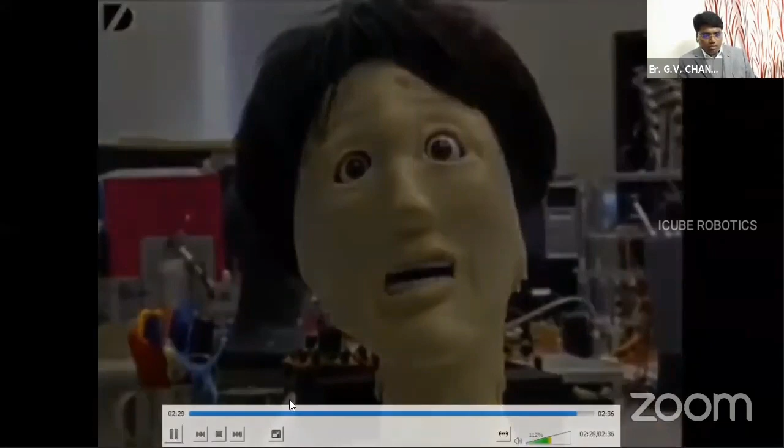So here we saw, now you would have understood the basic understanding of how robots have evolved. There are a lot of videos actually available to understand how, from the 15th century to our current century, robots have evolved. But at a given time, this small glimpse of a video made you understand that initially the robot doesn't have a proper structure, in terms of movement and stuff like that. And probably in later days, as you saw in the last video, even emotions can be programmed. So that's how robot evolution came into existence.

So nowadays, even the humanoid robots have evolved into an extreme called andro-humanoid robot, which exactly resembles a human being. So in that video you would have seen, initially Sony brought in the Aibo robot dog, and then different generations of robots, bio-inspired robots, and then they started introducing into the market the first humanoid robot, Asimo. Just remember this, Isaac Asimov, who coined the word robotics.

So next, getting into the other stream. Yes, we have more participants who join now. Just to brief you, we explained about what a robot is, the difference between a robot and a machine, then we discussed about the laws of robotics.

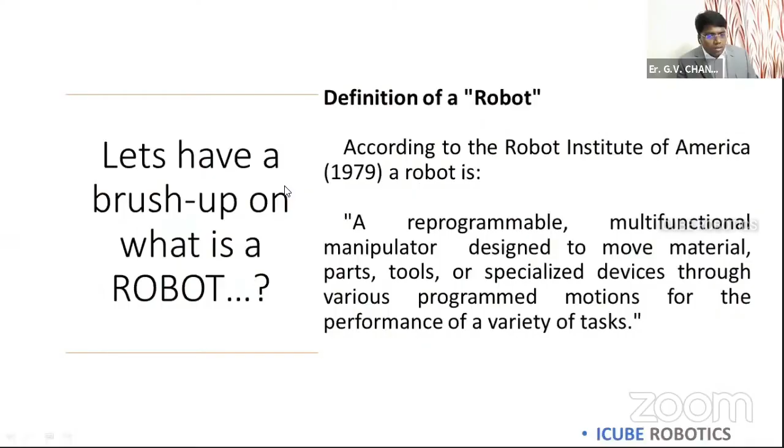Basically, robotics is a multidisciplinary engineering subject, and I am very glad that this presentation is given for 12th standard students. This 12th standard is a very important stage where you choose what kind of engineering, and this choice of your career in engineering, as well as the college, will actually make you what you are in the future. So that's the basic foundation required right now.

During this 12th grade, I am happy this institution has arranged this for you, so we're getting into understanding the different streams of engineering required to get into a robotics-based company. Starting with robotics, you cannot constrain a robot into just one subject or box. Robotics is a multidisciplinary engineering field, so whatever engineering stream you're in, you have an opportunity in robotics. That's good news for you today.

All the designing and external work in terms of getting into the real design of the robot, the mechanical engineer takes place. Next, we have the electrical engineer. You might be wondering why electrical engineers also have a very major role in robotics.

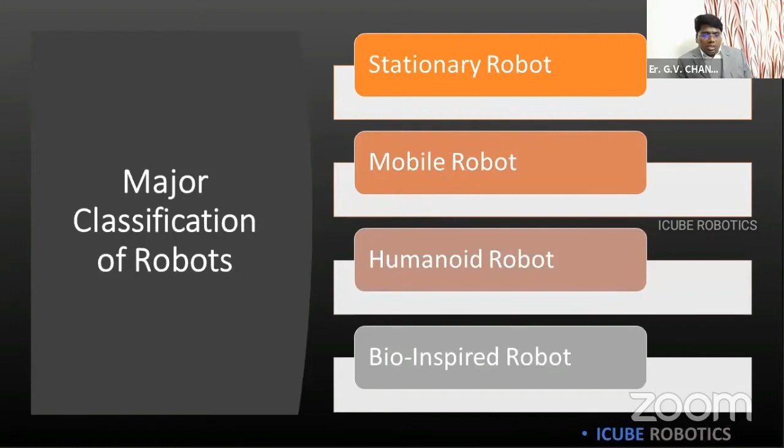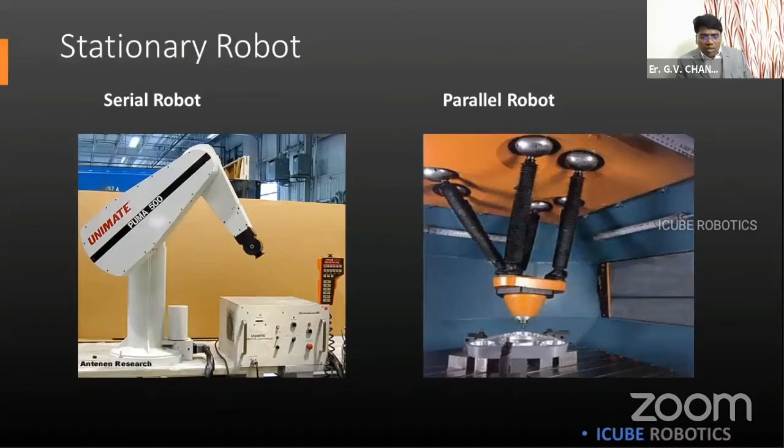So further, getting into understanding stationary robots, which is what I was telling you about - we have the serial manipulator and parallel manipulator. Stationary robot is something which is fixed and working. In serial robot, we have the arm serially placed, that's the meaning of serial manipulator. Then we have the parallel robot as well. We have a lot of topics, so I'll just rush through briefing these things and focus on the trends in robotics much more.

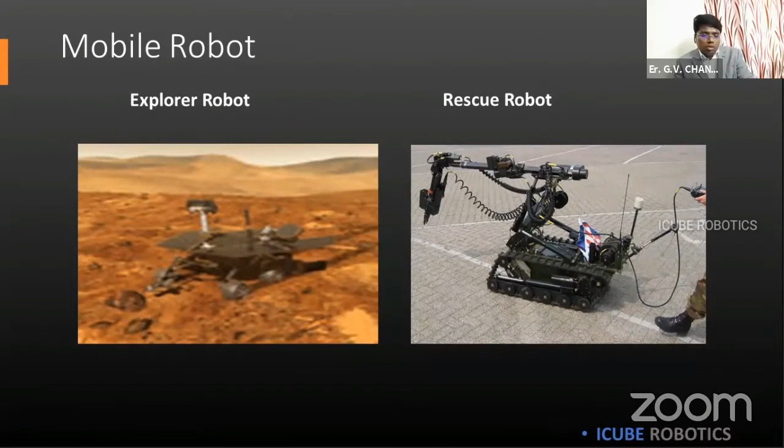Then we have mobile robots - here it can move around, so we have Explorer, different kinds of rescue robots also come under this mobile robot category. And then we have humanoid robot. Basically, if a humanoid robot resembles a male, we call it an android. If it resembles a female, we call it a gynoid. So even in this video on the evolution of robots, finally you would have seen a robot that was talking in front of the camera.

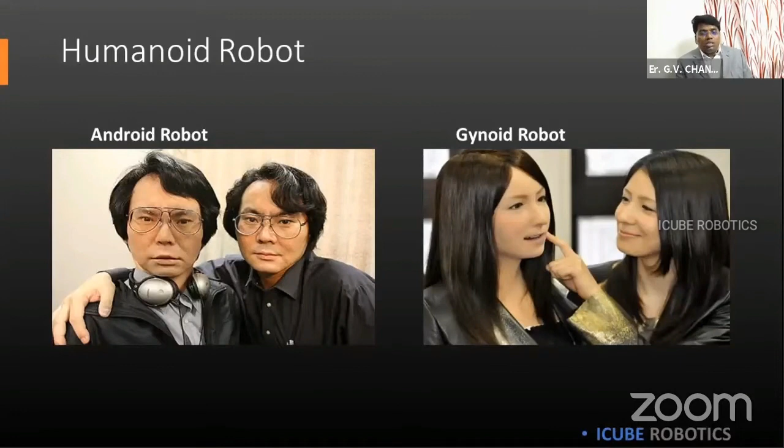So here we have this robot, called a Saya robot. This Saya robot was deployed as a teacher in one of the schools in Japan. Later, the Japan government proposed that robots should not be used in the teaching profession. We know the concept of a machine is a one-time program, but the robot has an option called reprogramming. So with that option, they reprogrammed the Saya robot, and now she is working as a receptionist in one of the hotels in Japan. That reprogramming concept is what makes the robot different from a normal machine.

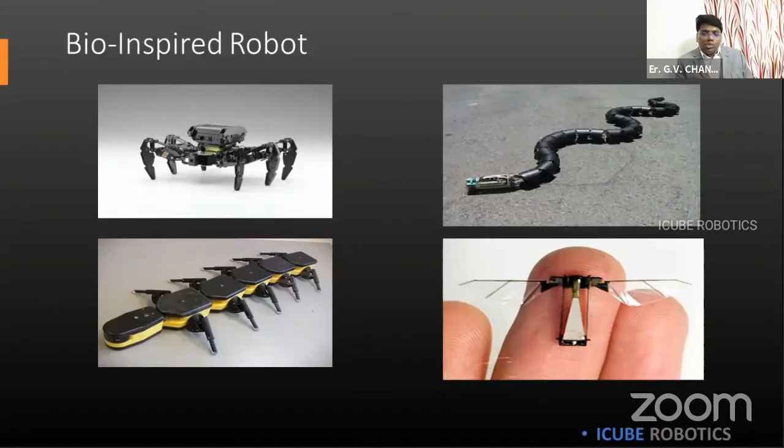Then we have bio-inspired robots. In the slide, the last picture is the world's smallest robot. You would have come across this bio-inspired robot in movies as well, in different movies this is being used. That came into existence after an incident that happened in Taj Coromandel a few years before, where nobody was able to enter the hotel, check out, and see what was happening inside. So this robot plays a major role—it can get into or enter through a keyhole. That's its specialty. If it's a spy robot, even a keyhole is enough for it to get into, and we could observe what is happening inside and properly take necessary measures.

So now let's get into the mainstream of our today's topic, current trends in robotics.

There are various trends robotics is facing now. You would have come across, even in Chennai, hotels where butler robots are being used. We deployed a butler robot in ITC hotel in Bangalore 6 years before. Now a lot of evolution has come even in terms of butler robots. Even right now in this COVID situation, robots are being used to serve patients, and they find a major role in terms of interacting with patients as well.

So if we focus on current trends in robotics, we have different streams of robots, right from medical to military. We have robots being deployed in different fields, and the first major role we could see is in the medical field.

Just to add one piece of information: in +2, most of you are there right now. Few of you might think engineering is not your cup of tea, and that you're more towards the medical field or science subjects. But to be clear, technology has to be adopted, no matter how focused you are on science. The Indian Medical Association, a few years before, came up with a syllabus integrating robotics as one of the subjects in their final semester paper. The reason is that robots are being used in the medical field, and doctors are in a situation where they have to equip themselves to operate on patients using robots.

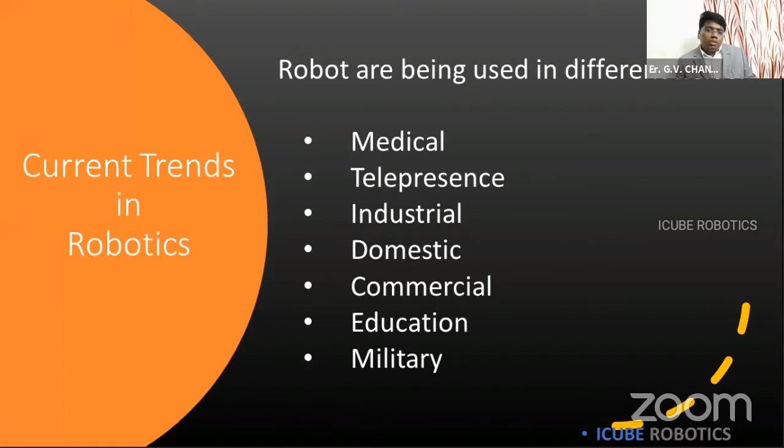So let's get into this current trend. We have the medical field, telepresence, industrial which plays a major role, domestic, commercial, education, and military. So let's focus on the mainstreams where current trends in robotics are being placed.

So this is the robot I'm talking about: the Da Vinci surgical robot. The surgical system is quite interesting—the surgeon has to get technical practice to operate the robot. The surprising thing is that this robot can operate on a patient anywhere in the world. For example, a doctor in America can operate on a patient in India using this console, just by connecting the two consoles.

So the doctor has to get equipped himself in terms of handling the robot, and the robot will do the surgery. Here he has the 3D glasses where he can see the patient operating. The blood loss is very less, and there is high precision in operation. This gives more clarity and precision during the operations as well. Let's see a small video of how this robot is operated.

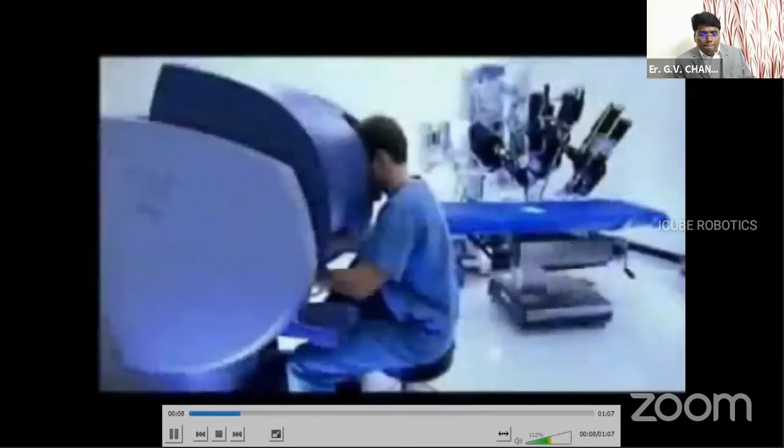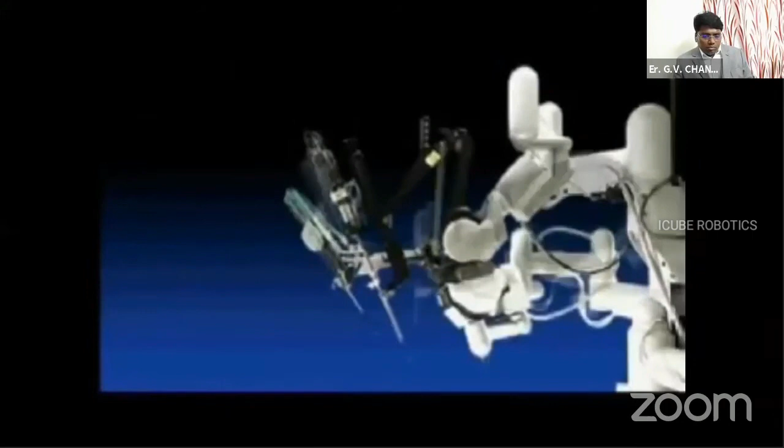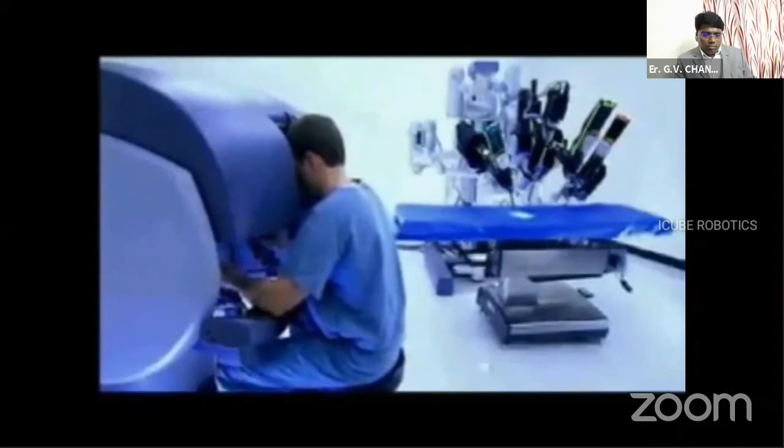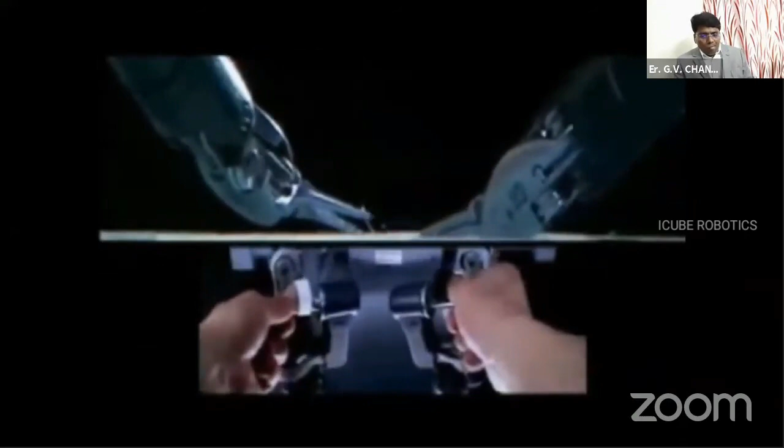The Da Vinci surgical system is a requisite investment for any hospital's minimally invasive surgery initiative. It is the most advanced surgical platform available today, consisting of an ergonomically designed surgeon console and a patient-side cart with four interactive robotic arms: one to hold and position the high-resolution stereo endoscope, and the second, third, and fourth to control high-precision, fully articulated endo-wrist instruments. While seated comfortably at the console, the surgeon views a magnified, high-resolution 3D image of the operative site. Powered by state-of-the-art robotic and computer technology, the surgeon's hand movements are scaled, filtered, and seamlessly translated into precise movements of the endo-wrist instruments. The net result is an intuitive interface enabling unparalleled precision, dexterity, and control.

That was an introduction to this Da Vinci surgical bot. So even in the medical field, this plays a major role.

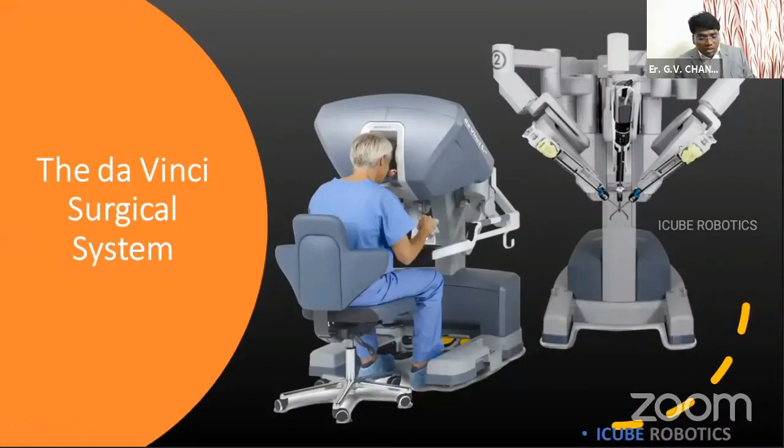Next we talk about the telepresence robot. This telepresence robot, in current trends, as I told you earlier, right now even in this COVID times, the doctors talk to the patient using this telepresence robot. So in many fields, and right now in this situation, these robots are being used.

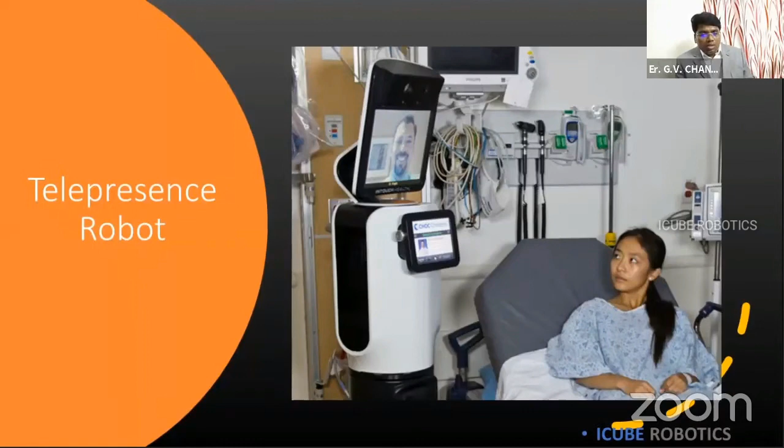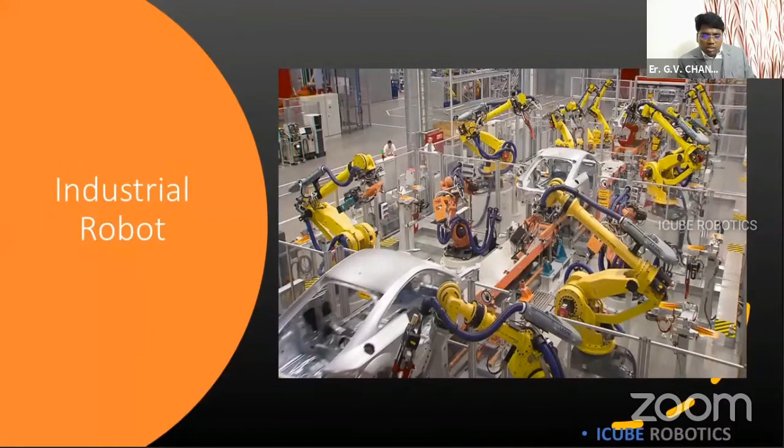Let's see a small video on that to understand how this robot is being deployed in different fields of operations.

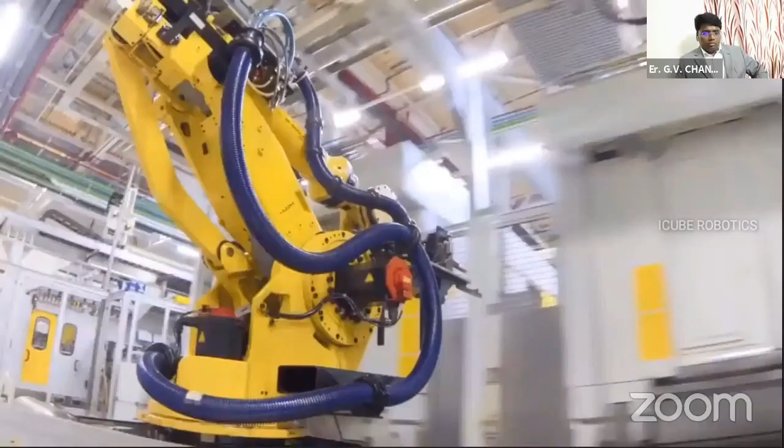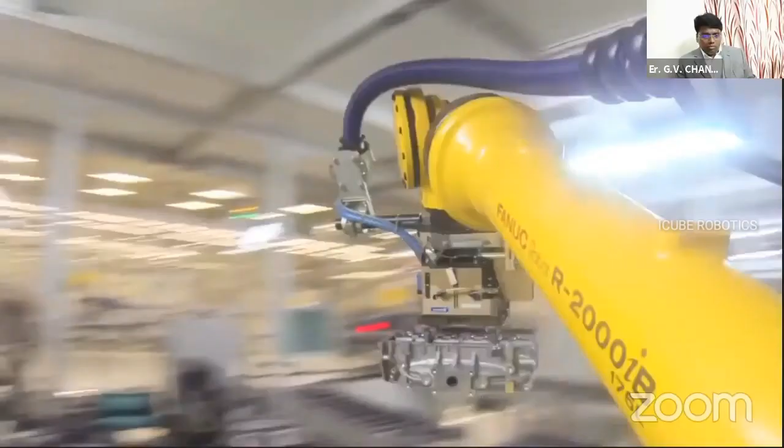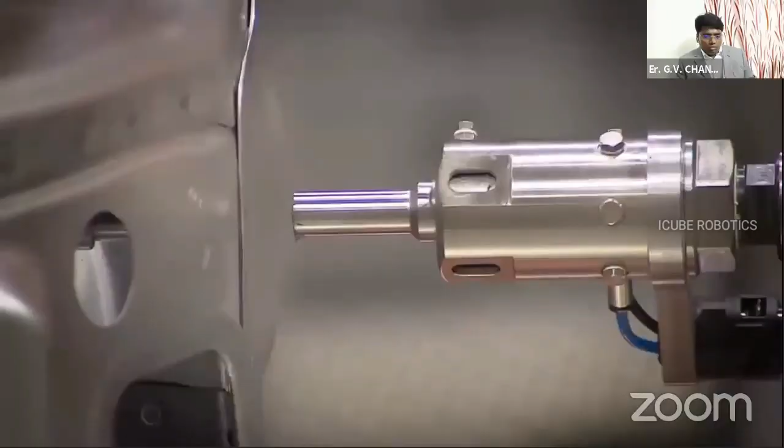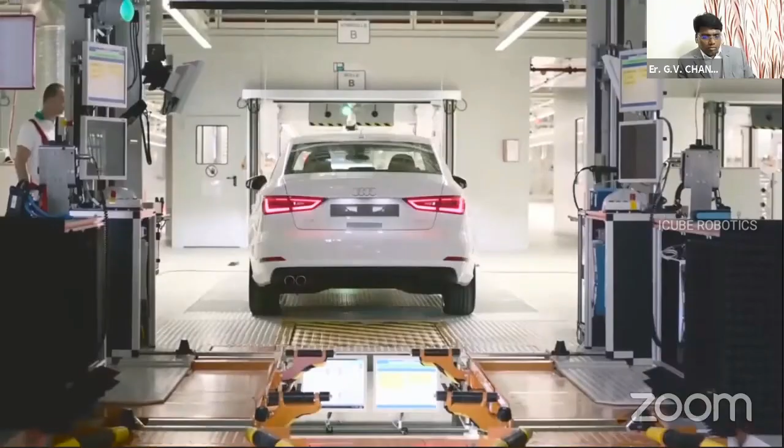FANUC robots and factory automation solutions have been facilitating industrial production for over 60 years. FANUC is present in 120 countries, including Hungary, assisting key sectors like the automotive industry, for example at the Audi Hungaria Motor Limited factory in Győr, where they develop and manufacture cars for Audi AG and the Volkswagen Group. Audi Hungaria is one of the companies with the largest turnover and export in Hungary, producing 2 million engines and 135,000 cars in 2014. In our experience, FANUC robots work reliably at our factory. We are constantly improving our production and install robots to reach our targets. In environments where we need to work with high pressure or temperature, the robots are up to the task and deliver quality standards which would not be possible with human machining. Essentially, robots are used for applications too difficult for humans or where rapid machining is required. Our colleagues like working together with robots as they make human work easier by delivering these tasks. It's very important to program these robots correctly, because when problems arise, it's usually not the robot that causes them, but improper programming or lack of maintenance. Regarding this, I'd like to highlight that FANUC robots are easy to program, dependable, and we have very good experience with them.

As we saw in the video, everywhere in terms of manufacturing this unit of cars, this FANUC robot arm is being used. To give you a practical example, recently we received a project from Mahindra City, Mahindra Cars, in Chengalpattu, where the robots are being used to actually open the door of the car.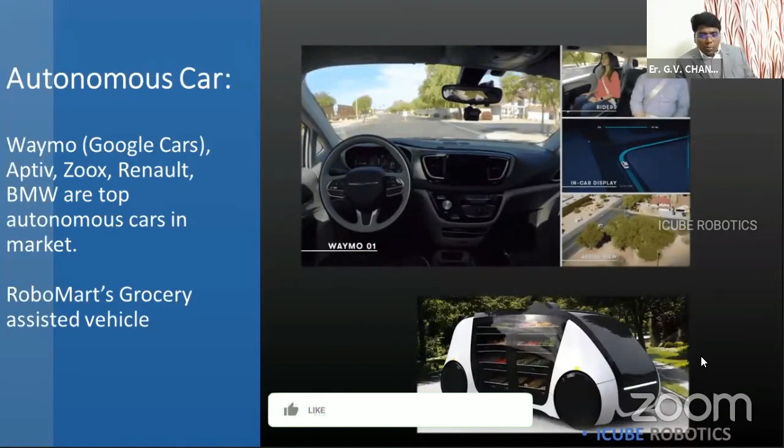Talking about the streams we have in college, we have different streams in our AMS college, right from computer science, EC, mechanical, EEE, and IT, which is majorly focused on the core subject of getting into robotics. Earlier, people had a different idea of how a computer science engineer or an IT guy can get into robotics. Initially, there was an understanding that only a mechanical engineer can get into robotics.

But actually, even in India, there is no UG in robotics. Right now only a few colleges are coming up, but there's no UG degree in robotics, and university-approved robotics courses at UG level don't exist. But at PG level we have robotics - if you want to do MTech or ME in robotics, you basically have to come from a mechanical engineering stream. That's how it was in the earliest stage.

But right now, different engineering streams are getting into robotics - computer science, where programmers are very much needed, then ECE electronics, which is very important, mechanical for the external structure and all the designing part, and EEE for the motors. I'm giving you a basic outline since you're 12th standard students; in college I could go into much more detail. And information technology integrates all the IoT systems - integrating sensors and motors, that's also part of IT.

Aalim Muhammed Salegh College of Engineering, Avadi, Chennai. Easy transportation facility to reach our college. We provide our own college buses in and around Chennai. Fully air-conditioned computer lab equipped with more than 500 advanced systems.

Different methods of education are provided through projector classes. Mechanical labs with different and advanced equipment for which safe hands-on training is provided. EEE and ECE labs are well equipped with advanced technology devices for practicals. Fully furnished classrooms with interactive sessions of education are provided. In our college library, a large variety of GK and academic related books are available.

We encourage all types of sports and fitness related activities for physical development. We provide hygienic hostel with food facility for both boys and girls. Well sanitized and spacious prayer halls are also available.